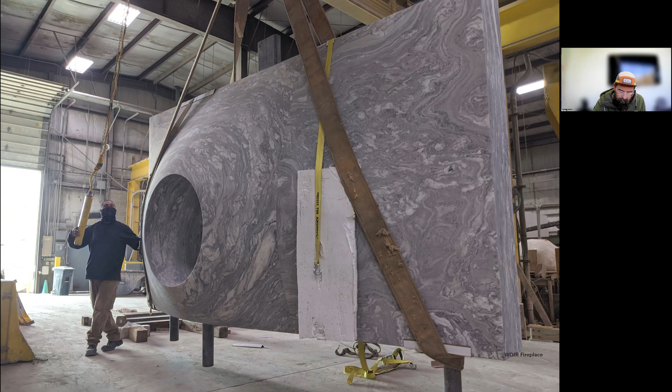Today, we'll pull back the curtain to expose what happens on our factory floor, where we test the limits that have defined art, architecture, and making since the beginning of the Paleolithic.

So just to give you a brief structure of what we're going to present: I'm going to briefly run through our production capacity in our new factory that we've built recently here at Quarra, and then talk a little bit about where we get our raw material from. Then we'll go through 6 projects and give you a behind-the-curtain look at how we make the things we make.

Some of these projects may have been published in the world and you may have seen them before. I can assure you that most of the imagery we'll show today probably hasn't seen the light of day. So I think it'll be kind of exciting to show some of our behind the curtain process, and we hope that we can influence people to challenge us more in the future.

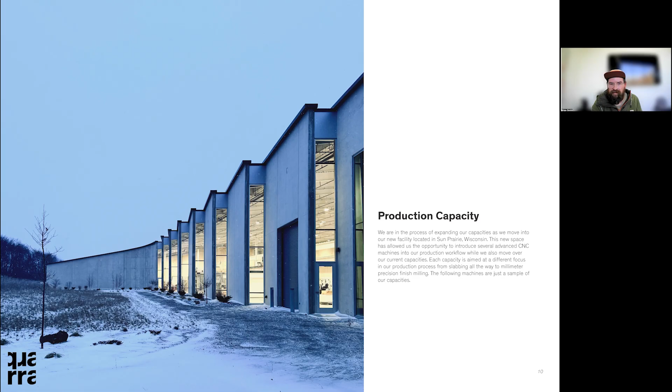So a little bit about our factory. A couple years ago we had a design competition and ended up hiring Snohetta to design our new facility in Sun Prairie, Wisconsin. It's a 66,000 square foot facility - this is a rendering of the front of it. We've recently completed phase one, getting the core and shell built and moving into the factory, and we're underway with the interior fit out of the building.

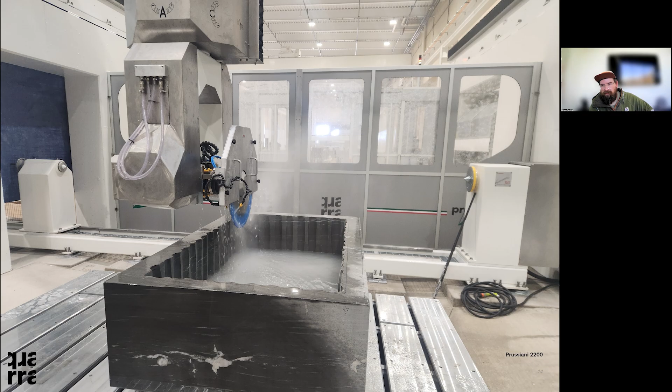Just to go through our capacities here, we do everything from raw material procurement direct from quarries as raw blocks. We have all of our own slabbing capabilities in-house, several different types of saws, but the hallmark of our production is really our 5-axis machining capabilities and our robotic machining capabilities, and in addition to that, our handwork.

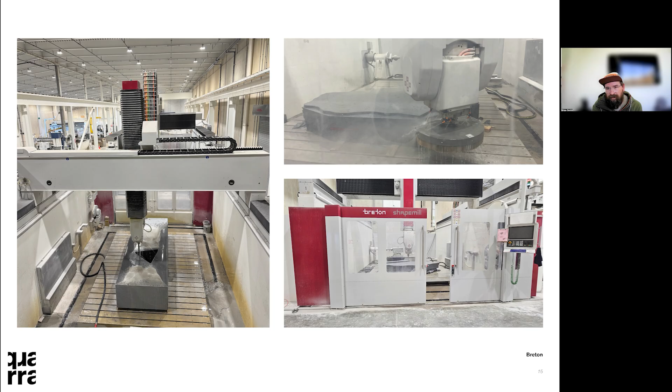So I'll just flip through - here's some of our 5-axis machining centers. This is a Breton CNC machine, very large work envelope. It fits a 2.2 meter tall object on a work table that's approximately 12 foot by 16 foot.

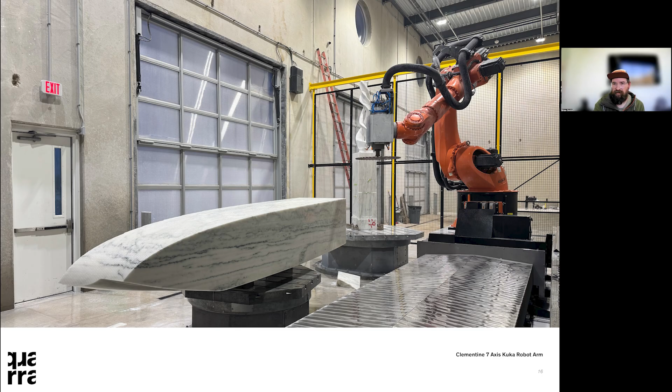We have 3 integrated robotic cells - these are KUKA KR480 MT robots, with integrated rotary tables that have a capacity of up to 50 tons. This one you see in the picture is our newest machine, Clementine, and she's sitting on a really nice linear track from Güdel. We're really happy with this new integration - it's given us a lot of new flexibility for large work envelopes.

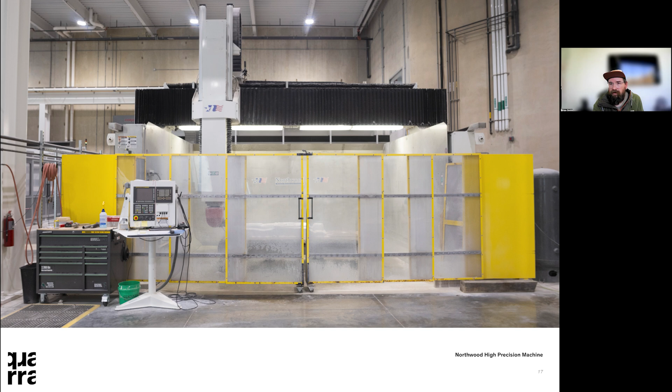We also have some aerospace capabilities in-house. This is one of our most precise CNC machines, made by Northwood. With this machine we are making some really incredible works of fine art, sculpting stone to sub-millimeter precision at this point, which is a really exciting territory for us to study, and we'll talk more about that today.

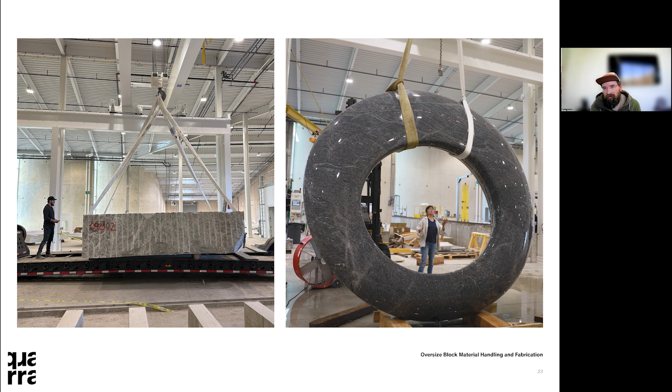And you might ask, why do you need 100,000 pounds of stone? This is a picture of a new work that I can't talk about - who it is or where it's going - but it will come out into the world soon. Just an idea of what gets made out of a 100,000 pound block.

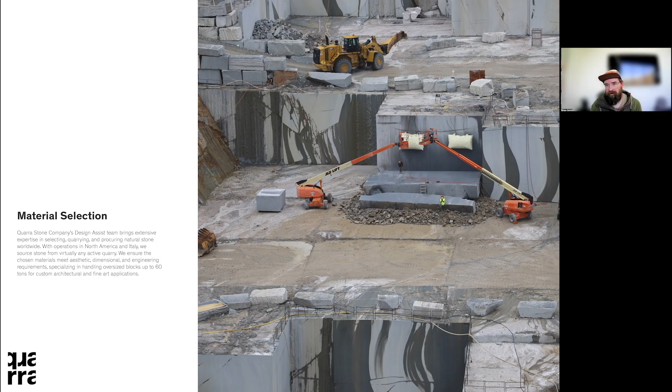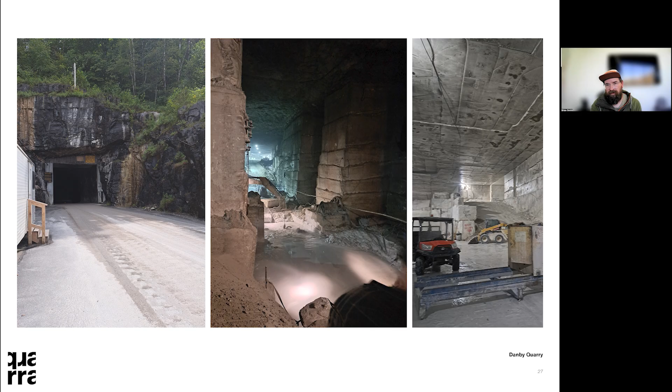We source all the material from quarries directly in the form of block. We're deeply involved in this process. We work and partner with professional geologists to understand the raw material from the source, and we work very closely with our quarry partners through the quarrying process to extract the blocks.

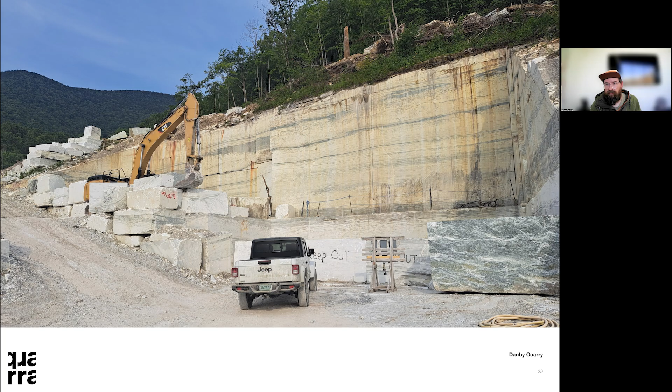Specifically to the work that we do every day, here are a few images. This is the ledge at the Vermont quarry where we recently extracted the largest blocks of Vermont marble to be mined in Vermont in the last century. They were extracted from this wall on the outside. This is called the Danby Quarry at Vermont. You'll see what those got turned into a little later on.

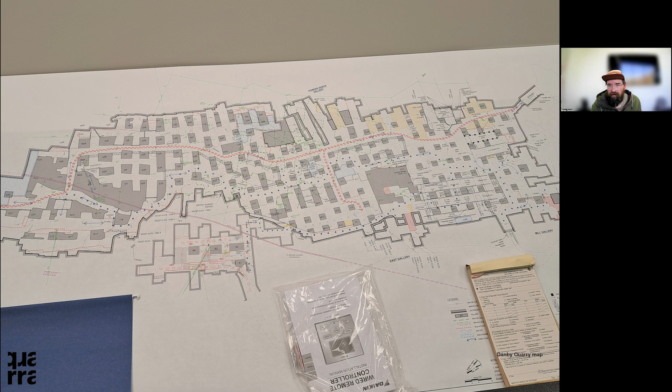A photo of the map of the quarry. We have a significant process that we keep track of where materials come from, and keep track of where blocks are extracted in the quarries. So the maps of the quarries that we work in can be really important. And then just some images of other quarries around the world that we work with.

Another thing that's really key to our work is how do we get it here? This is one of the procurement processes that we did a couple years ago during COVID. We learned, actually we didn't mean to learn this, but we learned that it was cheaper to rent a ship to move this many blocks, approximately 1,500 metric tons. It's actually cheaper to rent a ship from Antwerp and have it sail to the port of Milwaukee full of blocks than it is to put each block in an individual container.

So that's some new territory that we've been exploring for how do we get our raw material. I think you'll see more through the presentation of where the material comes from and what it gets converted to. All right, I'm going to flip it over to Leighton here. He's going to talk about one of our most recent works in New York City.

I'm going to try and go a little bit quick here, but I am Leighton. This project is called Parallel Nature. It's the art wall that is at the base of the JPMC Tower at 270 Park Avenue. The four things I want to touch on here are the material sourcing for this project, the design process that went into it, the structural steel system that's supporting it, and the install strategy that was used.

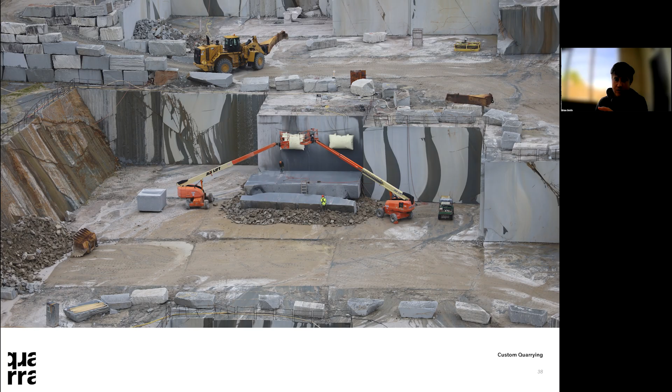In the material sourcing for this project, we had some unique issues where we had budgetary constraints and also material constraints, where we were trying to find a material that fit Manhattan schist in some of the visual qualities. But the structural qualities of schist meant it wouldn't work well for this kind of application. So the stone that ended up being chosen is Barre Gray, which is a granite.

The section of the quarry that we ended up using was around this one here. They had this diagonal rift going through the quarry—you can kind of see it on the left-hand side of this image. That led to a lot of triangular blocks, a lot of offcuts from larger blocks. We ended up going through this quarry, measuring individual offcuts of mostly scrap material, and then matching pieces directly to their blocks during that process.

So it was a really hands-on process of finding the home for each individual piece as we were selecting each block by hand. And the way that that was brought to it was in the design process.

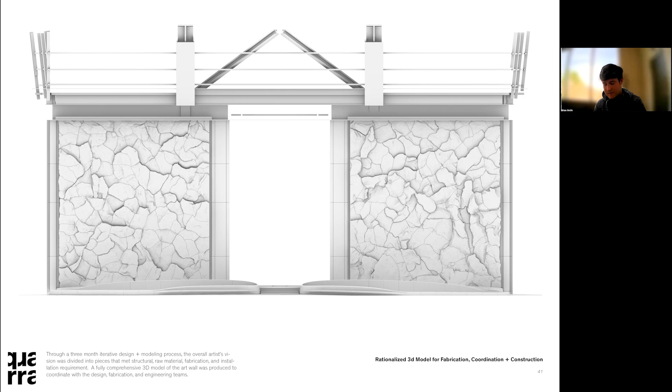And then you can kind of get a look at some of that structural system behind, holding up every single piece. This system is pretty unique in that it's designed to be a really, really quick install system with no adjustment in the stone placement. So that way the installer isn't moving pieces around during the install, pushing out the next piece—everything is located to one location.

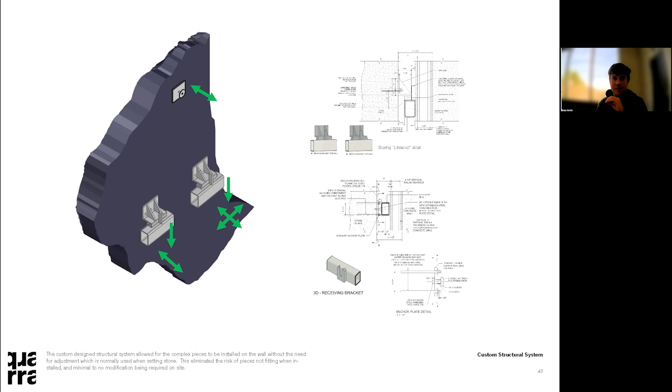Which is pretty precise, within a 16th of an inch, and it's kind of natural for a stone project to function that way. Every stone has its own unique 3 points of contact to the steel ladder frame behind—2 points taking the gravity load, one taking the moment load. And since every single outline of stone is unique, every single triangle of support is also unique.

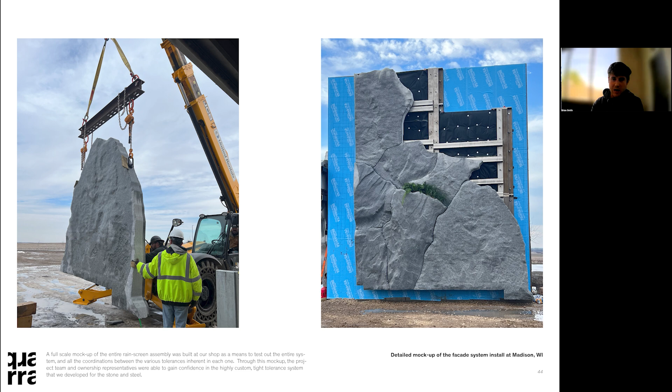And proving out that system, we did a 7-piece mock-up, which the thing that's unique about this mock-up is that those 7 pieces were not just discarded after the mock-up was completed, they were actually installed and used on the final project. So there wasn't any waste in the mock-up. They were reused.

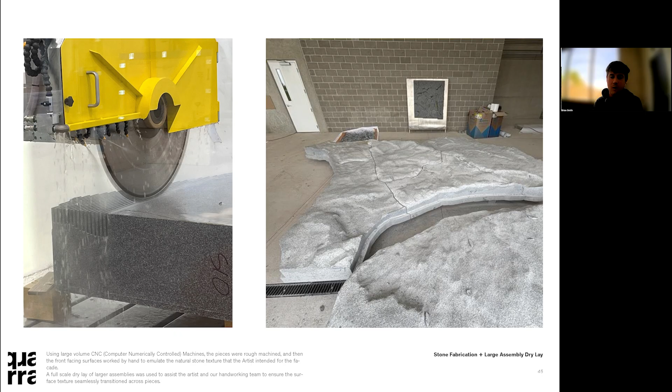It also informed the design process of the artist in getting the final finish of the stones. We ended up having this system where we would dry lay large sections of stones all together and have them hand worked all at once, so that you have features that travel across a lot larger regions of the wall instead of having pocketed moments of texture.

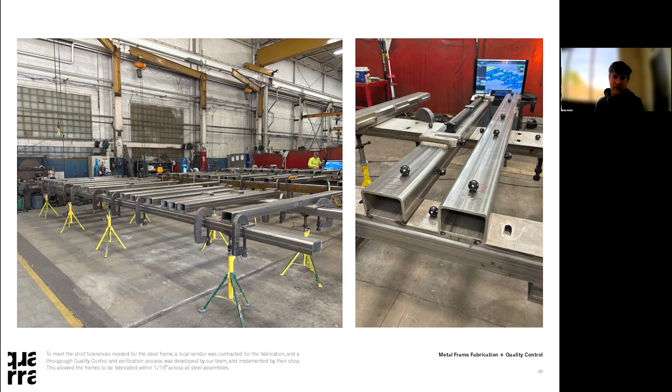This is some of the scanning and verification of that steel ladder frame system. It was really important that every single ladder point where the pieces were going to have contact was in the exact right location before it got to site. So this is some of that information of scanning every piece and matching it up within millimeter precision.

And this is the ladder frames going up on site. They're being attached there, and then these are the pieces getting dropped into place.

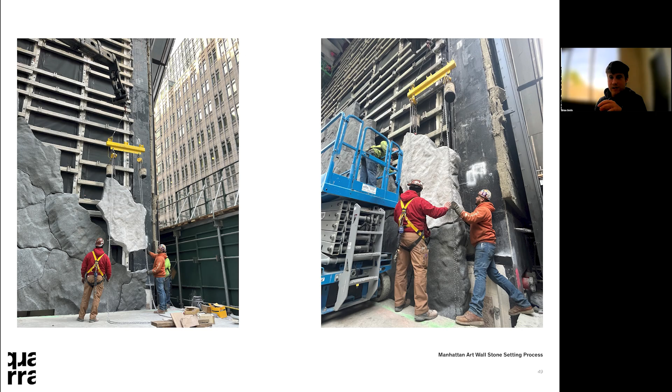The install on this project was about 3 months long. It was projected to be about 4 months. The first wall is the south wall here, and it took just under 2 months. Then the north wall actually took less than 1 month to install. The interesting thing is that there's less pieces on the south wall and more pieces on the north wall. So once they got through the learning curve of understanding the system, they were able to move at a really fast pace.

We were installing stones at the height of this project. It was about 20 or 22 stones in a day when they were hitting their peak.

So that is the parallel nature.

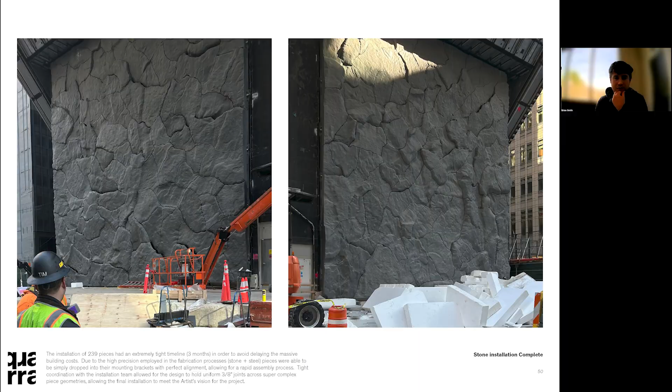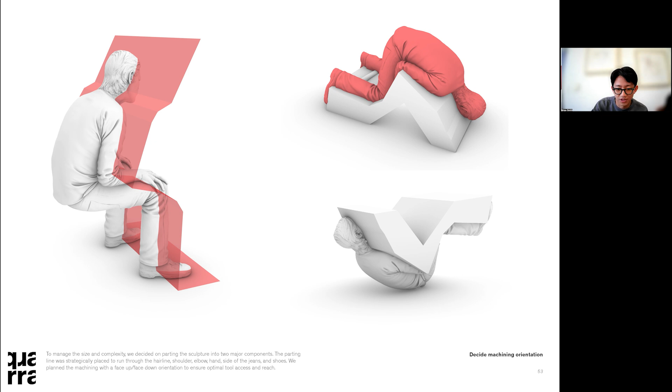Next we had to decide how we were going to fabricate this piece in order to have a parting line, because we know it has to flip at least once. Instead of splitting in the center, we tried to follow the nature of the sculpture and reduce all the undercuts as much as possible, so that resulted in a face-down position and a face-up position.

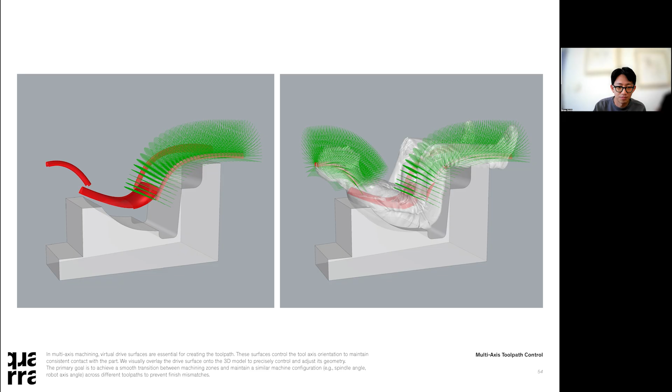In multi-axis machining, this demonstrates how we use a drive surface to control the tool angle precisely. We smooth the surface angle to make sure the machine will travel accordingly to make a smooth connection between zones. Because in tool pathing a piece of this size, we have to zone in like the head or the abdomen, the legs separately, and this drive orientation helps us make sure the configuration of the machine is precisely controlled.

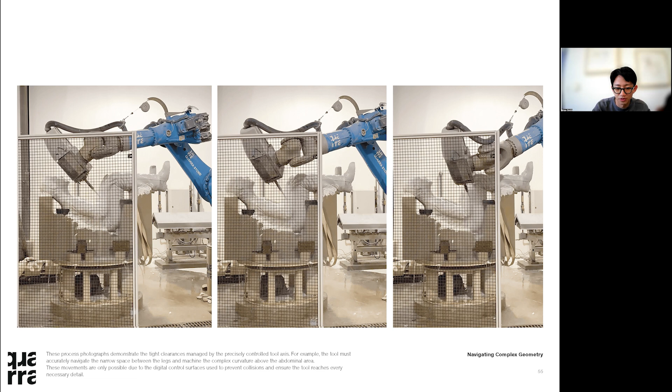Now we have to trust our software. Yeah.

And since we know that we needed at least one flip to finish machining, safety and planning moving was critical. So we normally do digital planning for the rigging and the moving of the sculpture.

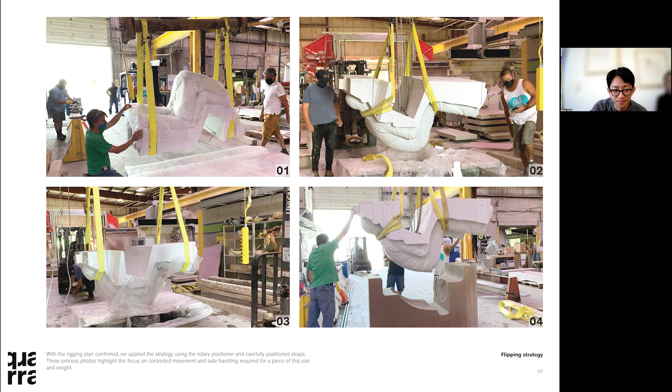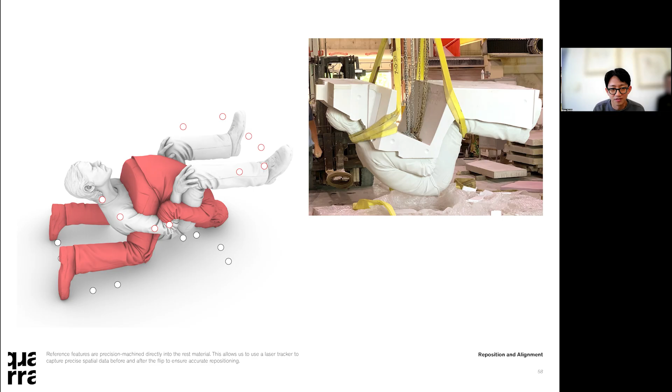After moving that, the problem is how do we reference the piece into a new position in space. So before and after the flip, we machine recess features into the rest of the blocks that allowed us to use a laser tracker to take points before and after. That gives us the spatial data that we can reference before and after.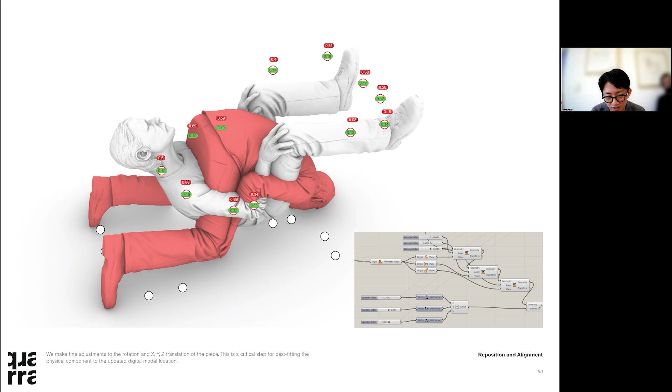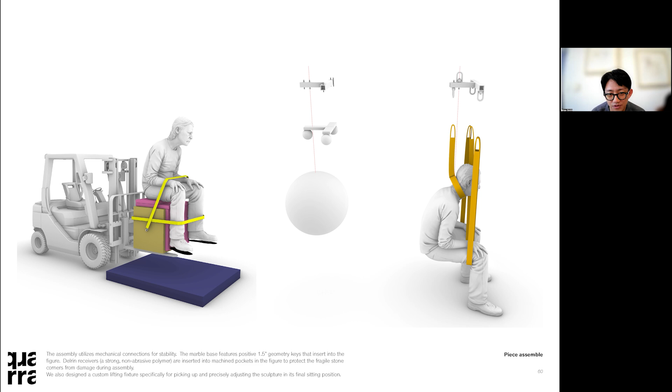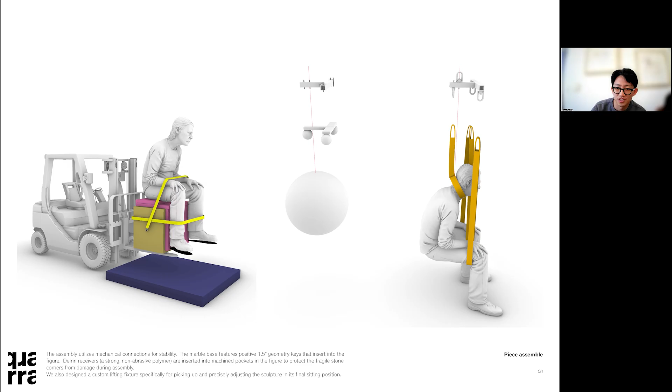After the machining is done, the next part is how do we configure the statue into a final sitting position. When designing a lifting fixture for this, we simplified the geometry into just a sphere for the center of mass for lifting. When we engineered how to lift it at 3 points, the interesting part is the neck itself can hold its own weight, but for safety we used three straps to hold it. We used an inline scale at each point to monitor and make sure all the straps have the target weight, so the weight doesn't concentrate into one local area.

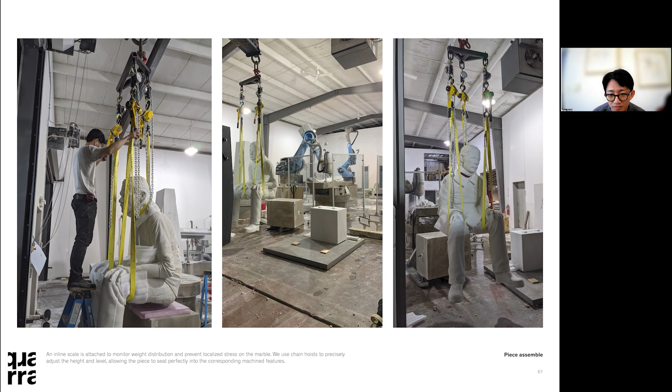When 2 marble pieces are combined, we use a big giant stainless steel clamp to hold the two of them and move the piece around. This is how we lift 2 pieces up and then drop them into the final location. The stainless steel clamp has its own lifting hook areas so it can clamp it, move it up, and then disassemble it once the piece is in its location.

And then this is how it is presented in the gallery in France.

Just a quick word on that - that piece within the Bourse de Commerce gallery is part of the Pinault collection, a permanent collection in France. It's pretty interesting - one of the first times that we shipped our work across the world, a couple of years back.

So the next project I'll quickly present is called the Two-Horse Relief. This is a 10-foot by 15-foot relief in Virginia Mist granite, on permanent display at the Met in New York City on the 2nd floor in the contemporary wing. At 10-foot by 15-foot by 1 foot thick, for a piece of granite, by contemporary standards it's really big.

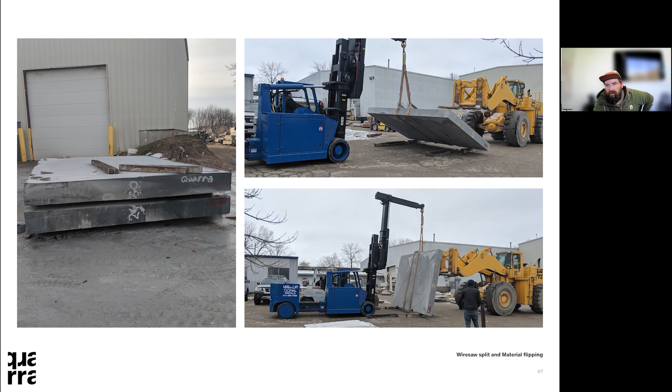Logistically, 40,000 pounds has to be picked up and flipped over after the artist selected the side of the piece that they wanted to be the finished face. We had to do some work to get it flipped over. You can see images here of us working with a VersaLift heavy lift forklift and an end loader to flip this 40,000 pounder over.

Step one was to machine in some structural fixings in the back of the stone. These are dovetail cleats that were custom machined from stainless steel. It's a two-part assembly that, when inserted into the stone, hooks into an undercut.

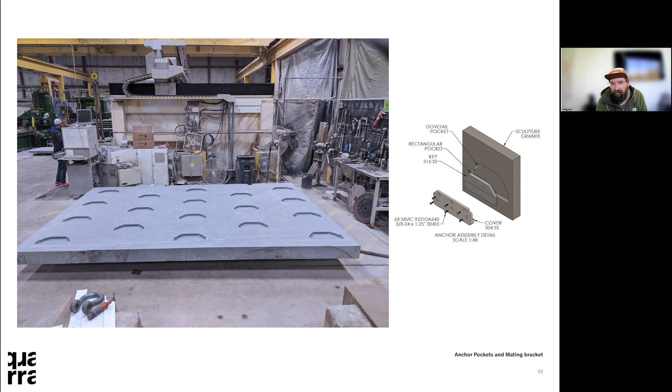There's no glue. This is entirely a friction fit connection, and sort of an impossible assembly that once it's bolted together inside of the cavity we machined in the stone, it cannot come back out, not without a tremendous amount of force.

So once we got the backside machined, we had to flip it back over and start working on the front. This is where we ran into another small problem. We did not at the time have a CNC machine big enough to house this big of a piece of granite to carve this geometry. So we had to work the finished bas-relief surface in two halves, one half in the CNC machine, the other half sticking out onto the factory floor.

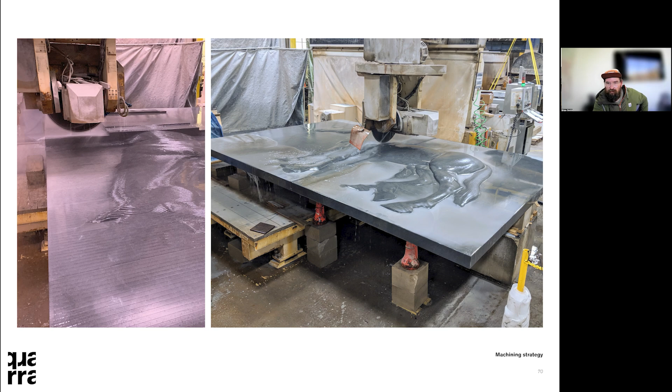This involved some significant processes internally to realign the part and adjust and register it once we had flipped it for machining. So upon completion of machining, you can tell here in this image, around the perimeters, the design thickness is 4 inches, and at the withers of the horse, it gets to approximately 12 inches.

This becomes a new significant problem in material handling, because we have to lift the piece up without breaking it in half under its own self-mass. So you can see in this image, we engineered a large tubular spreader frame that we bolted together, and then installed a set of I-beams underneath the piece at roughly quarter points to allow us to pick the piece up carefully and stably and transport it across the shop floor.

The next step was to affix the artwork to a custom stainless steel frame, which acts as a carrier and a structural stiffener for the bas-relief artwork for future purposes. This piece of stainless steel is designed and engineered for a lifespan of forever. The intent of the artist is for this work to not leave this planet, and it's actually pretty wonderful that it got housed at the Met.

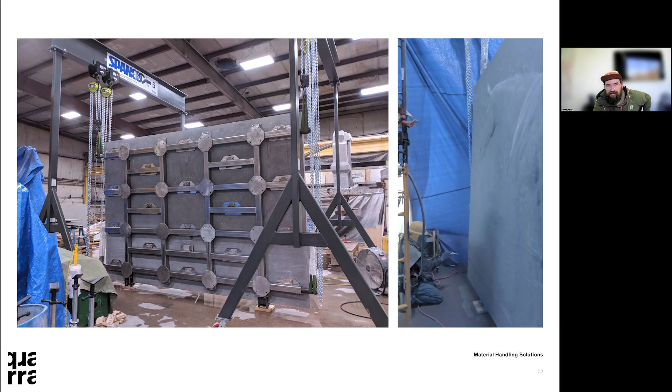So you can see on the back side of the piece, the dovetail pockets are filled with the structural fixings, and then you have a large stainless steel frame stiffener. The final finish of the piece was a sandblast finish, and this is a good image to give you a sense of the scale of the artwork hanging in our factory from the gantry cranes. And then we washed it up.

The next step, this is where things got a little bit dicey, because we have a piece of work that has been now accepted by the artist, and its value in the art marketplace is significant. I don't know what the value is, but it's more than an average day at work.

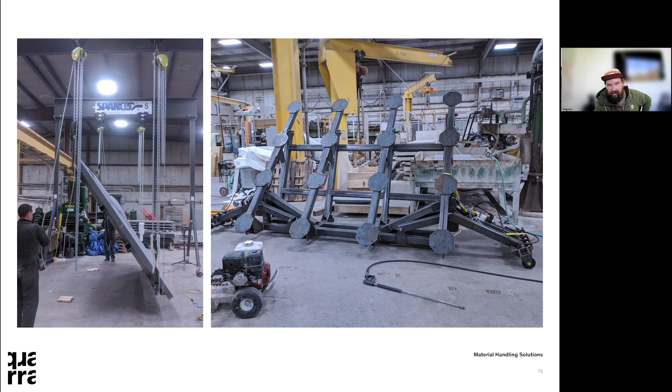We had to then load this piece of artwork onto this custom engineered crawler frame. You can see on the right side of the image where it was bolted to the frame. This is a good visual of how we mounted it to the frame. We hovered it over the frame, slid the two together, made a series of bolted connections, and then relieved the crane pressure and transferred the load onto the crawler, seen here in this image.

That crawler is custom designed to roll across a shop floor or a museum space. Another nice feature of it is that it just barely fits inside of a high bay shipping container, with literally half an inch to spare or less, which was kind of an interesting moment for us, stuffing that into a container.

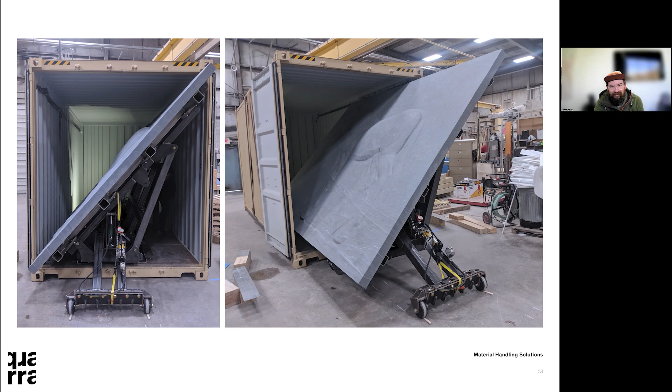As you can see here, there's Mark and Phil, two of the handlers of the work. They had a long day, along with me, getting that into the container. Then we loaded it onto a semi truck and said goodbye.

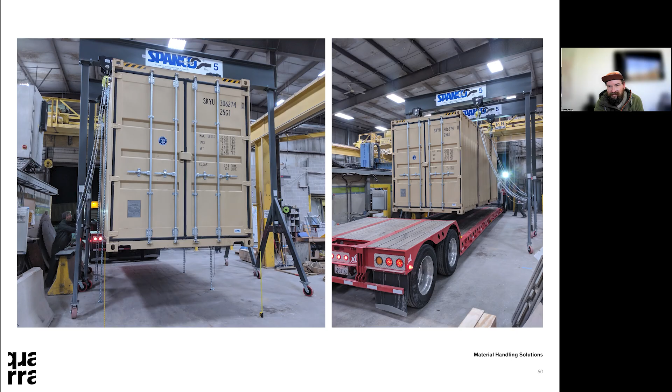I'll give it to Brian to intro the UVA. So this is a project we did a few years back with Höweler and Yoon. This is the UVA Memorial. It consists of a ring of stone that matches the diameter of the rotunda on the campus there.

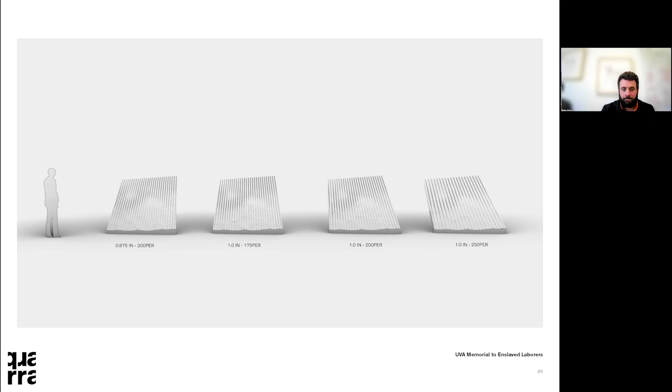One of the big design challenges through this, we worked through quite a few rounds of mock-ups, both digital and physical. The artist we were working with on the project wanted to have the eyes—you can very faintly see it here, you'll be able to see it in some later photos—of one of the slaves, or the first known slave, Isabella Gibbons. So this was a memorial to enslaved laborers, meant to honor and put those people's names in something more permanent in this memorial.

As part of those mock-ups, we went through a lot of different studies of the photo V-carve process. Traditionally, photo V-carve uses a black and white image to create a depth map. It's typically done on a flat surface, but on this one they had both a scalloped texture meant to be reminiscent of the slaves' scarring on their backs, and they also wanted the eye pattern in that same surface. The whole outer shape is this tapered conical shape, so we had to take the method of doing V-carve on a flat surface and find a way to map it parametrically onto this complex surface and still achieve the visual effect.

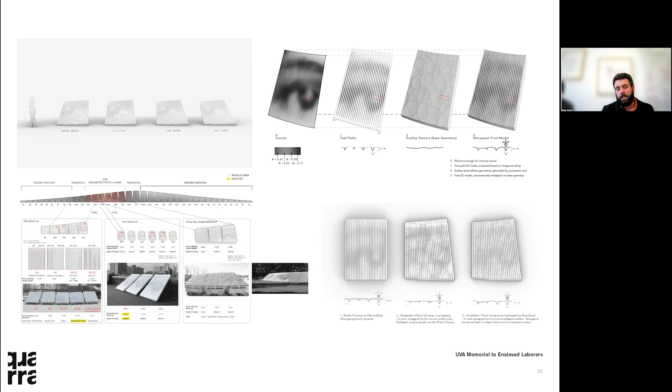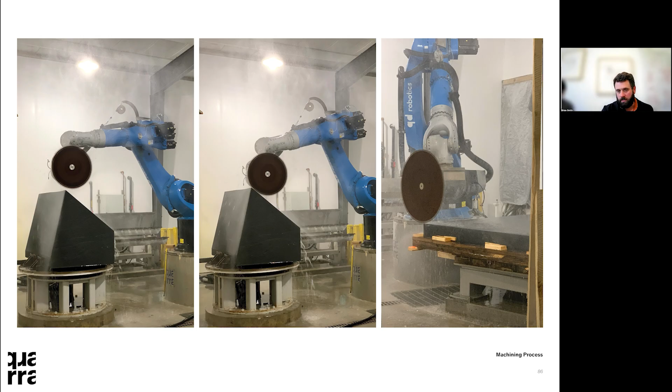We have some photos later that show more of that mock-up process, but the fabrication for this project had to be distributed across multiple machines. We had a range of pieces from very large volumetric pieces, done on some of our larger robotic cells because of the work envelope, as well as some of our other CNCs for the flatter panels that had the texturing, and a water feature that was in the center.

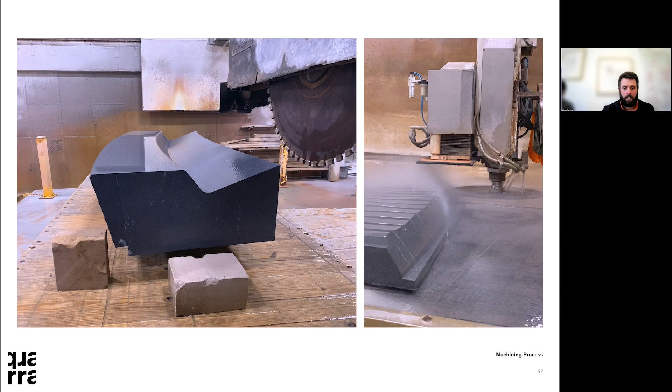All of the machining on this project was done with blades. That's a pretty traditional workflow we use—we use blades horizontally to do finishing in granites because it's a harder stone, and you need that stronger tooling. It's also a huge time savings versus using traditional milling tools. Again, this is another project done in that same Virginia Mist stone that the Collier Memorial is in.

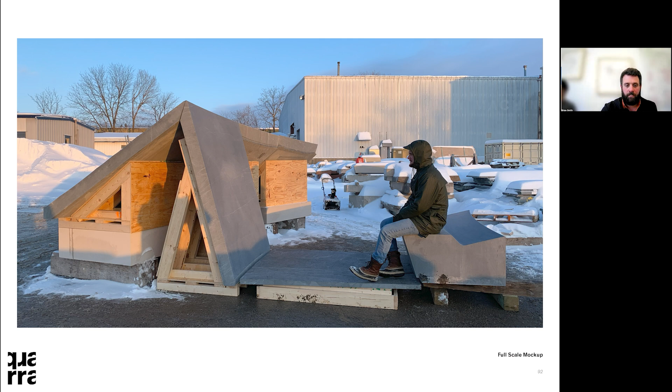We also performed, I think this was a 7-piece mock-up for the architect, just so they could get a sense of scale and ensure that the way they had their design laid out was going to match what they wanted the experience to be. The interior section is meant to be a contemplative space—you can sit on the bench and have time with all the names and markings on that inner wall. So this was a way for them to verify their assumptions about the scale of everything and the geometries.

Again, these are just some of our full-scale mock-ups looking at different depths of V-carve, different spacings, and studying how that was actually going to work out in the end.

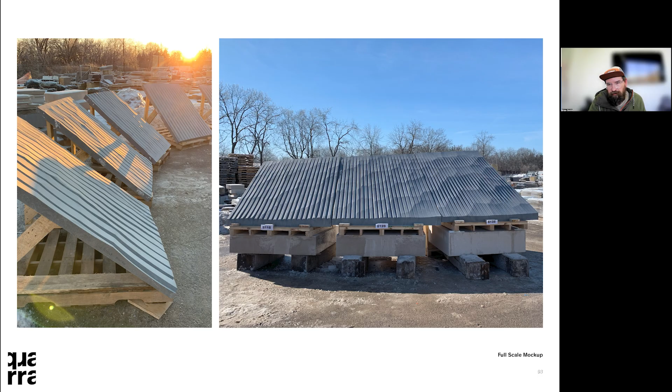And then Alex will talk some about the installation because we also performed the installation on this. One thing that we experienced here that hadn't come for Quarra in the past was doing a large-scale installation. In my experience prior to joining Quarra, I had done 4 or 5 public art installations, nothing near as complex or as significant as this one. But I worked alongside Brian, and we developed a lot of novel strategies for install, and then I went out there and ran a crew on site for 4 months installing the memorial with our own team. It was a unique install because we staffed it with our own people, and some of the people on site, shoulder to shoulder with me, were master stone carvers, hand workers, masons, people with really old world experience in making things out of stone.

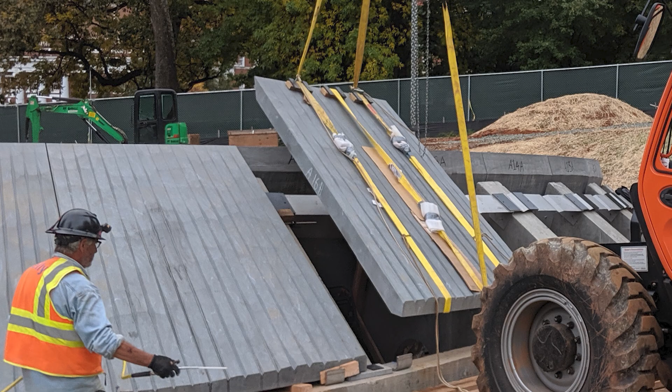Just a few images of the interior wall of the memorial. We set all of the stone on site with a 15,000 pound capacity Lull. The site conditions really weren't conducive to using a crane. The other thing we know from our own practices here at Quarra is that picking up fragile stone and doing precise setting with a crane with a 100+ foot whip line is frankly very difficult to do and risks the piece a lot. So we opted to use a much more controlled piece of machinery where we could really go slow. Stone is a slow material, and I think installing it slower is better.

Just a few more images of the install. There's one of our carvers, Eric, doing some final dressing to a piece of stone on site.

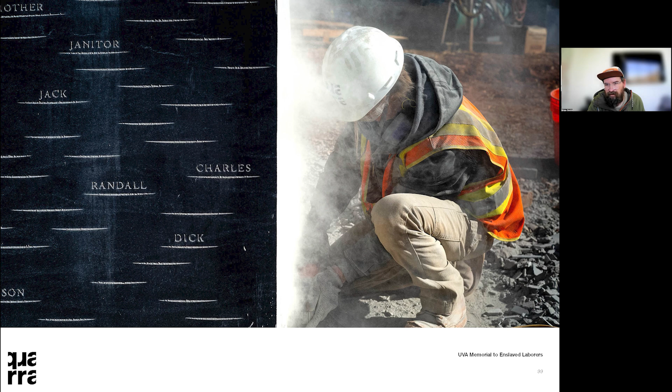And then an image of the eyes emergent from the backside of the piece. This was a really special moment for us on site because it wasn't until we had all of the back wall pieces on the memorial, and in the right sunlight, that we got to see if the eyes actually worked. One interesting thing is that in different sunlight, the eyes entirely disappear and what you see are the scallops, so it has a really nice play between those two textures.

Another image just giving a sense of scale and the way that the inner wall and the outer wall meet each other. There's a transition point where it goes from architectural panels about 6 inches thick to full-scale solid thickness pieces of stone. If you happen to ever be at UVA in Charlottesville, definitely go check it out, it's a really inviting space. Just a few more images of it as built.

All right, flipping back to Brian, another one. So another round of - we've actually done 3 projects with this artist. Sarah Sze is a media artist, and she has a series of boulders. The primary concept behind it is that it's as if you found a geode, split it open, and instead of crystals inside, there's a pixelated image.

The interesting thing with this project is, probably to date, it served as our biggest kind of R&D development over multiple versions of the same thing. We've done three sets of these boulders: one in San Francisco, one in New York, and one in Santa Monica. The wild thing with these is they consisted of between 180,000 and 360,000 tiny holes that we then custom mix up to 126 different colors with natural earth pigments and then extrude into the holes. So it's effectively like the world's worst color by number.

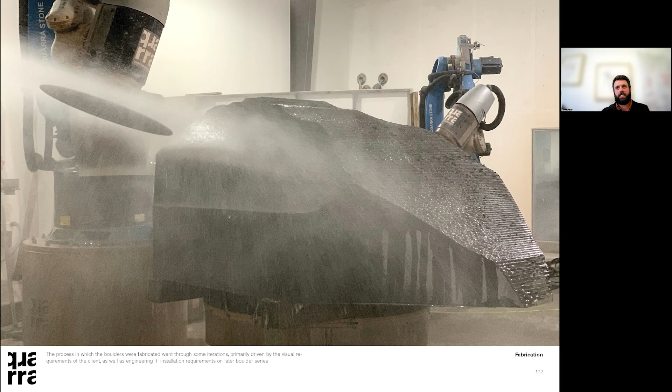The next part of this project where we went through another R&D development stage was the fabrication of it. On the initial boulder, the request was: let's go find a boulder at the quarry, cut it in half, and then do all the painting. We did go through that process. The challenge is it's very hard to find a boulder of the size and geometry that the artist wanted. We did find one, went through the whole process, and then ultimately the geometry of the backside didn't have enough character, didn't have enough features to it. So you can see in this picture, after the project was almost completed, we had to go and by hand reshape the whole back.

After that, for round 2 and 3, we collectively decided it was better to start from a block of material and then basically machine a boulder to some geometry that the artist has designed, and then through a bunch of handworking and machining processes, bring back some texture and make it look more natural. It does feel a little backwards doing that, where we're taking a block and making it look like a boulder, but in this case it gave us control and gave the artist the ability to have the size they wanted, because before it was all constrained by how big of a boulder you could find. It was easier to machine a boulder for us than it is to try and find one.

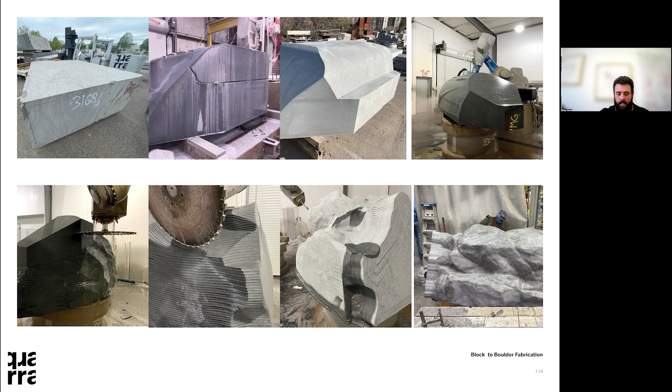We went through a few different rounds of process for how we actually fabricate them. Ultimately what we've landed on: we start with a block, do some wire saw cutting, and then with blades again, machine the base geometry. Where we have deeper areas, we go in with a milling tool. The final step, turning it back into a boulder, is all done by hand using some of our master carvers to bring that texture back.

Another significant challenge throughout this process is how we apply all these tiny holes across the face. So far, we've been sandblasting these holes. Initially, we machined the sandblasting template on one of our CNCs. The first boulder was able to fit within a 4x8 sheet, so that wasn't too much of an issue. The second boulder was much larger, so we couldn't fit it within a single sheet, and we had to find another way.

We ended up finding a laser cutter who could cut it for us. One challenge was how to align two of these templates to ensure perfect spacing without seeing a shift, while also dealing with some tolerances of their laser cutter that gave us slight shifts in the grid. For our next iteration, we plan to machine these holes on one of our CNCs directly into the stone, to eliminate one of these variables that gave us difficulties.

Another interesting part that grew as we went through the project was the handworking process. Because we're working with epoxies with so many different colors, they have shelf life and cure time. Once we get everything extruded in the holes, we have to go in and handwork it down, then inspect all the holes to find any bubbles or holes that didn't get filled properly. In the first version, there was a very large percentage of holes we had to drill out and refill or touch up.

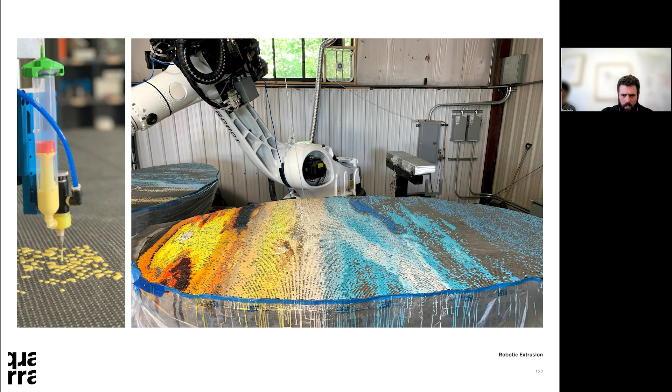This is the result of the one we did on the robot after it was all honed up. For the third iteration, one challenge we had was the fact that, okay, a robot's great, but you have to bring the piece to the robot.

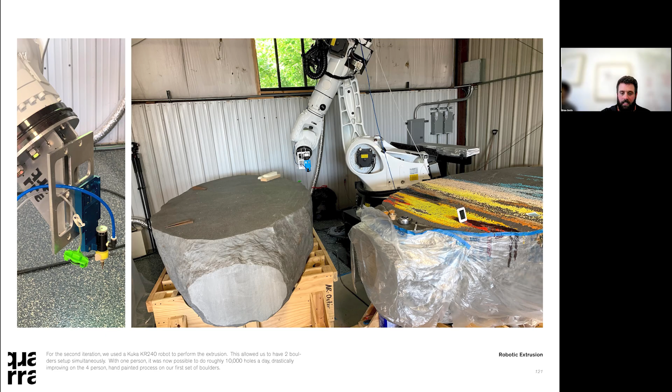As you can see in that last picture, it's really tight in here, and we had some challenges reaching some of these extents. We had to carefully position the boulders to align to the grid. The next iteration, we purchased and built a gantry that's portable, so we can move it over top of a boulder and have the boulder set up wherever we want.

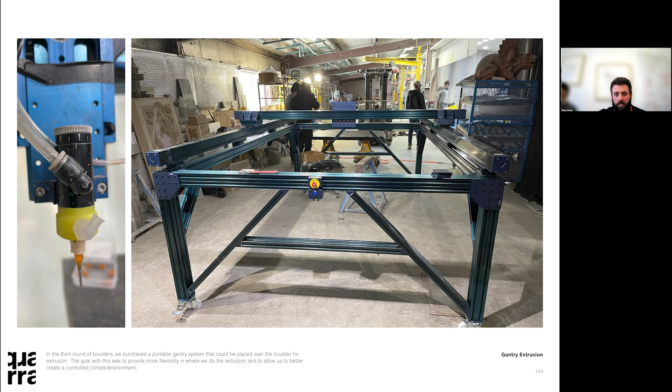The other challenge we ran into is the temperature control of your environment is really critical, and the humidity. With this, we could move it where we needed to and ensure good controls so that our extrusions would be better and we'd have better curing of the epoxy with less issues.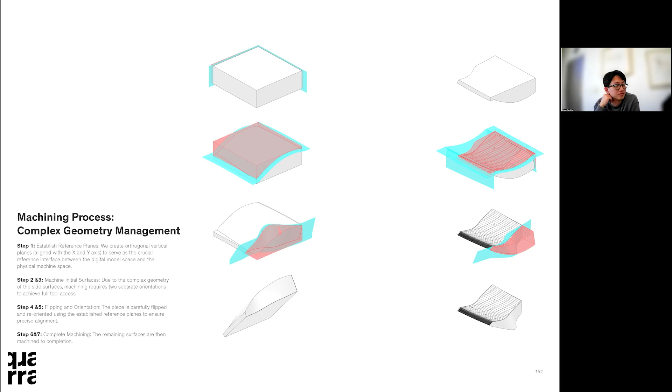Maybe I'll switch to Sam real quick to talk about the machining process. This project, I'll intro by saying the tolerance requirements are the most stringent we've ever seen, both in fabrication and installation. We're talking about sub-millimeter precision for the structural surfaces, and in addition the pieces in the field have to be placed with sub-millimeter precision. Sam will talk about the machining, and then we'll try to take a stab at talking about the install.

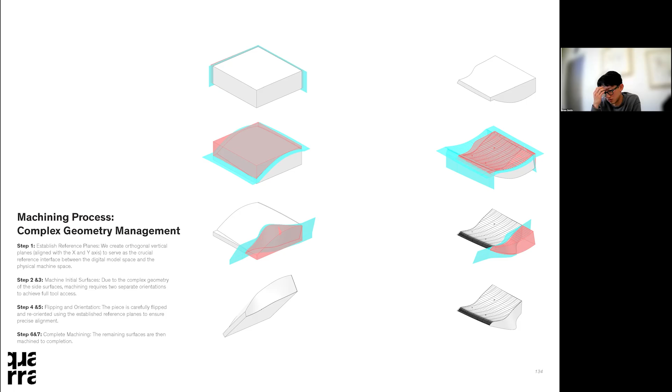If we were trying to achieve absolute accuracy across all machines, that requires us to tie down all the machining, handling setups, and all the reference points that we make. But if we use the repeatability and then use that to generate another surface to correct it, it kind of skips the process of chasing absolute accuracy, but we can still achieve the accuracy in the stone.

How we do it is we capture the data from the offset machining scan, and then we use that data to make a deviation map, and then reverse that map to create a compensating surface to do a final pass with the machine.

For piece handling, the finished piece has a curvature, and it's extremely dangerous to handle a tall, thin, curved piece. So to handle this kind of geometry, we built a custom cage to hold it down tight, which allows us to pick it up slowly, rotate it, stand it up, and face it down in slow motion with a crane.

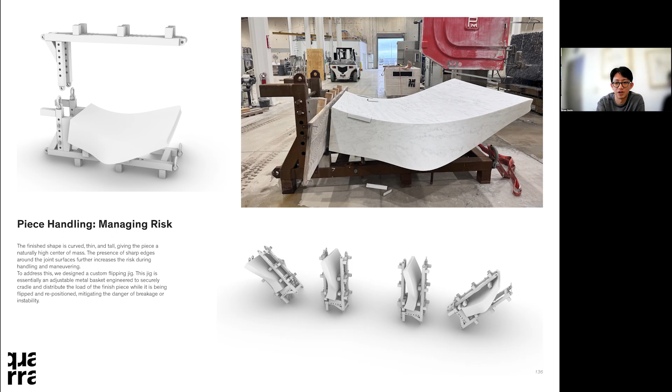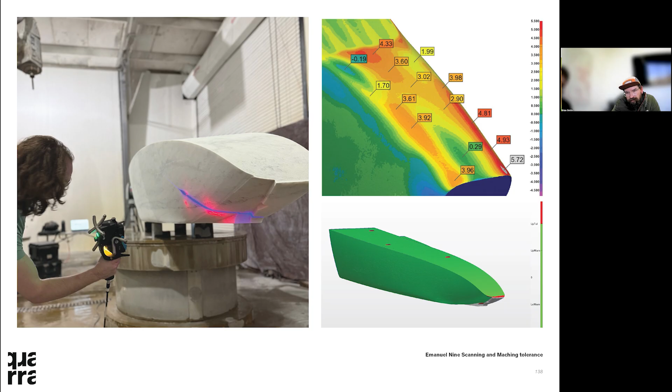3D scanning is a very significant part of this process. As Sam was saying, everything is 3D scanned and best fit compared to the 3D model to ensure that our precisions, especially along the structural surfaces, are adequate.

Another point of note: all of the structural anchorages on this project, because of their custom nature, were tested in a testing facility in Northbrook, Illinois with Wiss, Janney, Elstner to determine their individual structural capacities in this specific material. You can see on the surface of those stones all these lines where a geologist marked out any linear features in the stone.

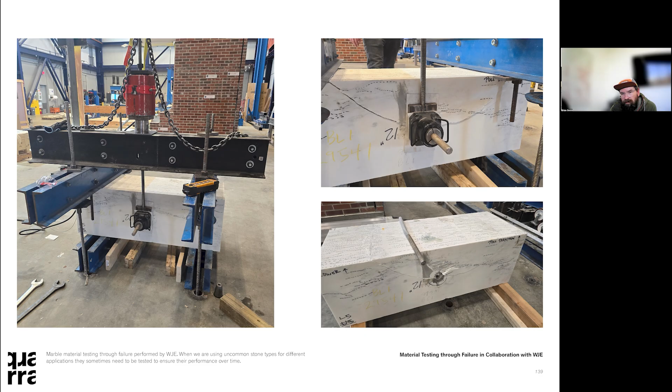After doing this break test in the laboratory, which I went down and worked extensively with them on this testing program, I observed the testing. This was really just to keep track of the breaks and see how corollary they are to the grain direction of the material, effectively the rift, you might call it.

In the process of this project, we've developed what we think is a novel undercut anchor assembly. This is the structural anchor that anchors this into the marble slab. What we do is mill a 3-inch diameter hole with a core drill, then use a very long tool that we stick down in that hole to make a belled undercut shape. Then we use a hydraulic grout product from Sika to bond the double nut washer assembly in.

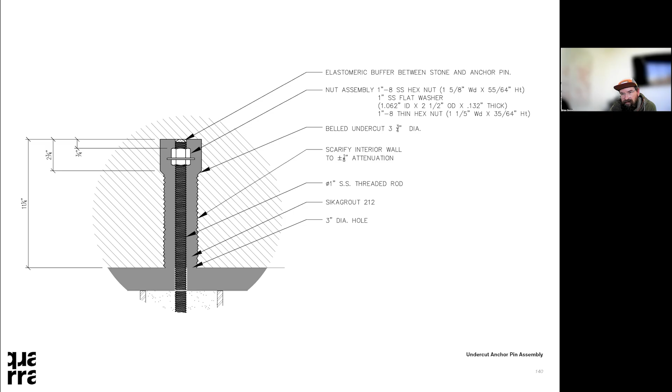This anchor assembly really outperforms most mechanical undercut assemblies. In addition, it kind of blew epoxy out of the water in the laboratory. So just a little point of note there.

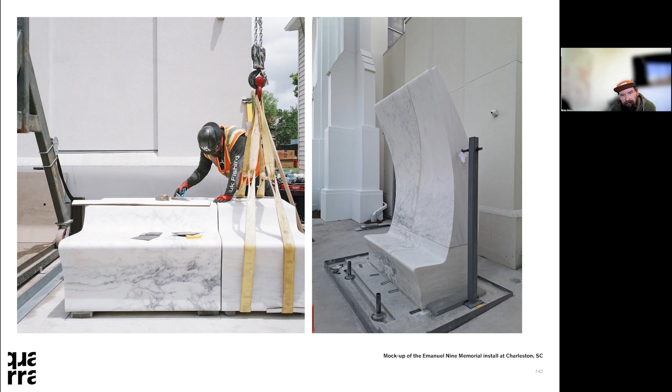So an image of our crane system that we developed on site. All these pieces, as I was saying before, have to be set to sub-millimeter precisions in the field from a structural point of view to ensure that the structure is adequate and can be relied upon. An image of our gantry crane system that we engineered and built.

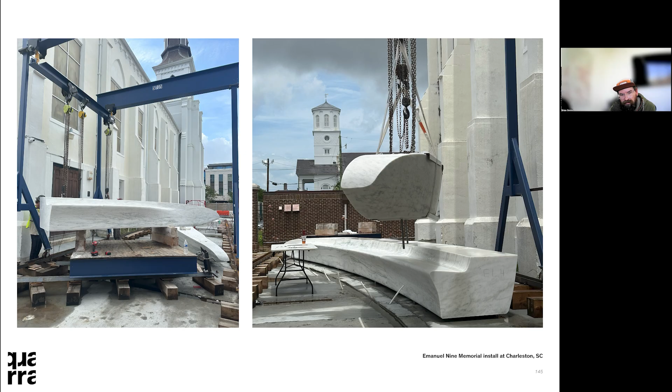This is our crew down in South Carolina installing, and some photos of the marble pieces being laid out on site. The site is very tight, so we built this train track system where we put 15,000-pound pieces of marble on a cart, roll them out into the memorial courtyard, rig them up with a crane, and transit them across the site.

This would be a little hard to understand, but what you're looking at is we've taken all of the three-dimensional scans post machining and realigned them with the original design model through best fit algorithms. On the face of each piece of marble in the field, we have a physical registration point we've tracked through scanning. You can see those nodes on the screen.

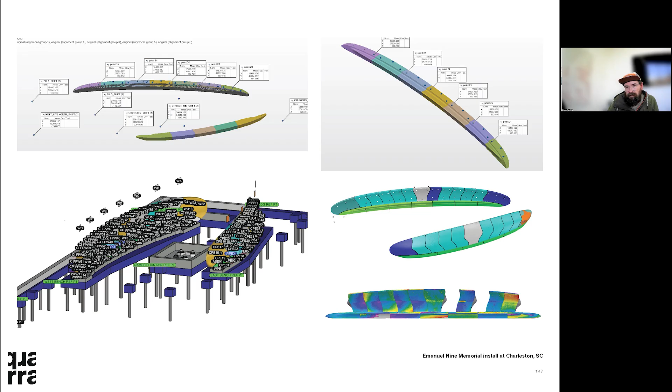So when we go and set these pieces in the field, the setting parameter in the field, we use a laser tracking system with a handheld probe. You can see Brian there using the handheld probe on site. When we set those stones down, we have our laser tracker oriented to the world, the exact world that the model is positioned in the Rhino model. Then we go set the piece of stone down in the field. We use our Leica laser probe, which is accurate at 20 microns over 400 feet for a laser shot.

It's super accurate, and this is kind of insane, but we've been setting stone. I think our tolerances right now, we're in the hundredths of millimeters, but on average we're 0.1 or 0.2 millimeters from the design position with this methodology. So we're getting a little bit better at structural and performative setting here at Quarra, just an image.

And then I'll close with this. It's a little thing that I wrote just to kind of summarize. Often when we begin a project in stone, the solution is unclear, sometimes seemingly impossible.

Our work is driven by design intent and artist vision, grounded in engineering and material science, and realized through skill, precision, and generations of stone fabrication experience. There's no manual for what we do. Every success is built on a foundation of failure, and failure itself is essential. Our willingness to fail defines our ability to push the limits of practicality. Failure is a mechanism that expands the boundary of what's possible.

We work iteratively using digital space to simulate reality, to solve for the unknown and test variables through analysis. Digital tools let us refine the boundaries of traditional stone fabrication, pairing advanced metrology and robotic precision with old world craftsmanship. But every assumption must still be proven in reality, on the factory floor, full scale, in the actual material. The result is binary. It either works or it doesn't.

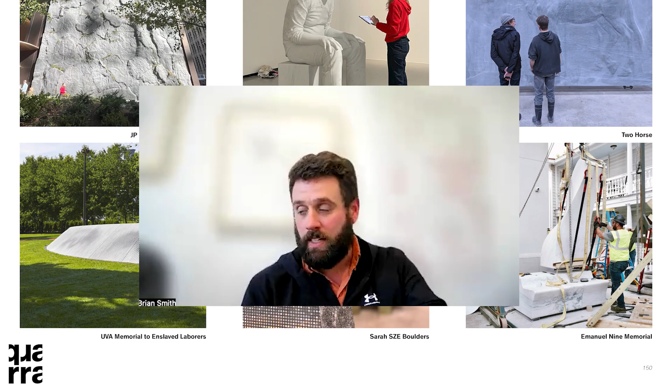I don't know if you guys have anything to add, Sam or Leighton?

I think for some projects, architecturally, the making is kind of the most important part. But for fine art, we're representing the geometry in different materials—if the artists have already done that in other ways, then we're just kind of specializing in stone to help them solve the problems.

Yeah, I think everyone else has probably summarized it well. If you'd asked me right when I started, I'd have had a different answer. But there's a point where you begin to understand this isn't necessarily a new practice, not just a modern thing—it's something that's happened throughout time, and I think it will continue to happen.

Thank you so much, this was an incredible presentation with lots of wonderful work. I guess trying to contextualize this—stone machining and stone fabrication at the building scale—do you see a future where stone will find itself playing a more significant role in how we make buildings, specifically how we structure them?

I ask because the way we build buildings today feels increasingly more tectonic—things are generally made for the purpose of being installed rather than crafted. Even though you're making amazing sculptures to be installed, you're ultimately also crafting them. So I'm wondering, do you find craft returning and being reintroduced at the scale of the building?

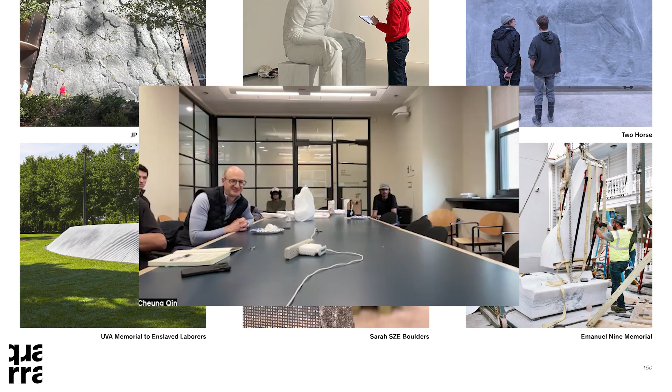I'm Jim Larson, I'm a stoneworker myself here in New England, and I'm crashing this just for the information. Oh, cool, to chat with other stoneworkers and designers.

From my perspective, as an artist carving stone, it's the most humble material on earth. As you said, it's the most common. And these projects that you showed are crazy, some of the wildest projects happening in stone. I guess as you manage budgets and timelines, you must constantly come up against this factor of technification, complexity, or climbing the ladders of precision. I'm wondering what techniques you have for managing that, how do you make stone more accessible for more people by keeping it humble and not so technified? That's a great question.

I think JP Morgan Chase, the first project, what is it? Parallel Nature is maybe a place that sort of starts. That's an architectural facade. Those pieces are really crazy.

From a machining point of view, we didn't talk much about the machining. I can tell you that the machining of that project was very simplified. Early on in the project we identified that we couldn't just mill every piece to this millimetric precision, so we had to find a way with some common practices in our manufacturing to generate that square footage and texture without it becoming so cost prohibitive that you couldn't build with it.